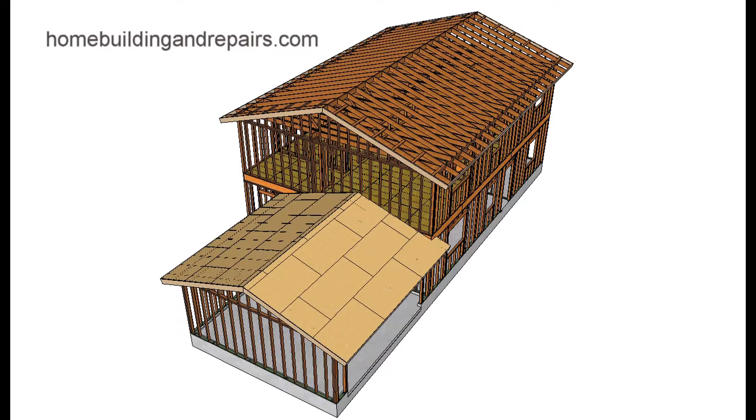Here's another question that I am receiving a little more often lately. People want to store more stuff in their attics, and they want to know if they can move some of the stuff around. Well, hopefully by the time you're done watching the video, you will have a little more information about that. Let's go ahead and look at a purlin.

A purlin usually sits on a wall. Sometimes the wall will be a non-bearing wall. It won't be designed to carry much of a load. Here we actually have the ceiling joist breaking over the wall, so this is a load-bearing wall. But you might have, and it's not uncommon, I see it all the time, a brace on, let's just say, this wall over here. It might actually be in the middle of that, and that's not uncommon.

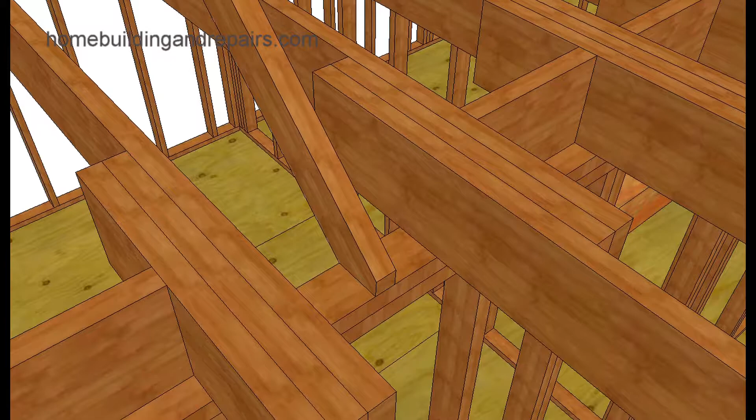Is it something that can create problems for the building? Yes, but most roof framers are not concerned about it. The purlin brace nails to the rafter. You can see it attaching to the wall, and it usually has some type of a block to support the purlin.

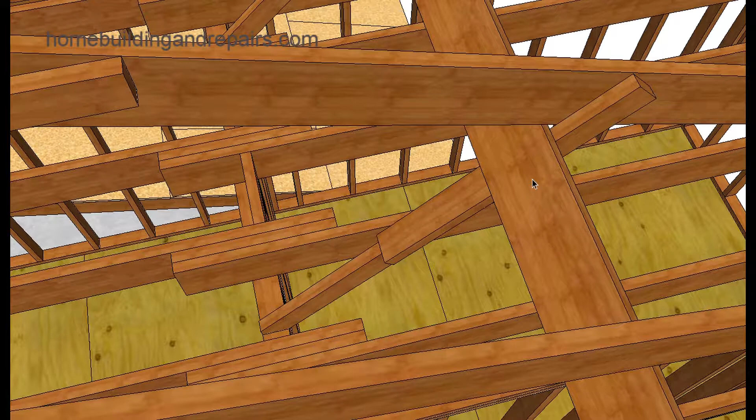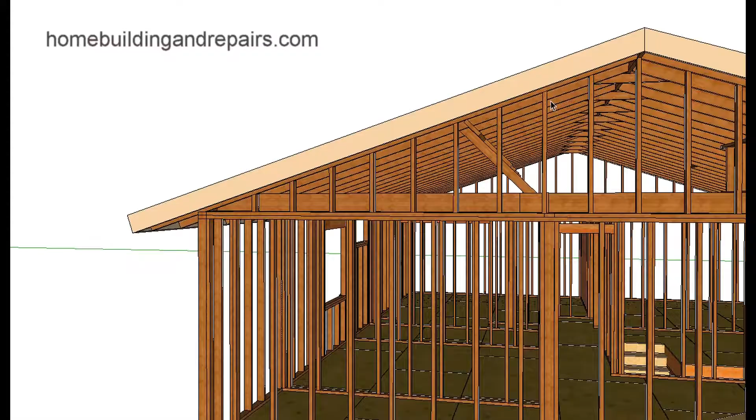The purlin system cannot be less than 45 degrees, so it cannot be 30 degrees. It can be 60 degrees. It can be more than 45 degrees. Now, the one person that asked the question wanted to know if they could remove the purlin that's angled and run something vertical. This is the main reason why I'm making the video, just to give you an idea of some of the stuff that could happen if you do this.

Another thing that I see a lot of is someone wants to build a wall. Hey, I'm going to build a wall, put it on top of my ceiling joists. This will be great and really strengthen the roof. And you're probably right. It will strengthen the roof, but it's also going to be putting additional weight and loads onto the ceiling joists themselves. The weight from the rafters is going to transfer to the ceiling joists and then down to the walls that the ends of the ceiling joists are attached to. I hope that makes sense.

So something like this isn't always going to be a good option, because the ceiling joists might already be at their maximum load-bearing capacity. You put some more weight on it and you are going to create problems, maybe a sag in your ceiling. Is the building going to fall down? Probably not. You build something like this, remove all your purlins and redo it, you might not have a problem.

If you live in an area where it snows, you might want to contact someone who does know what they're doing, and/or an engineer. If you live in an area where it doesn't snow, you don't really have a lot of weight on the roof, and that might not be as much of a concern.

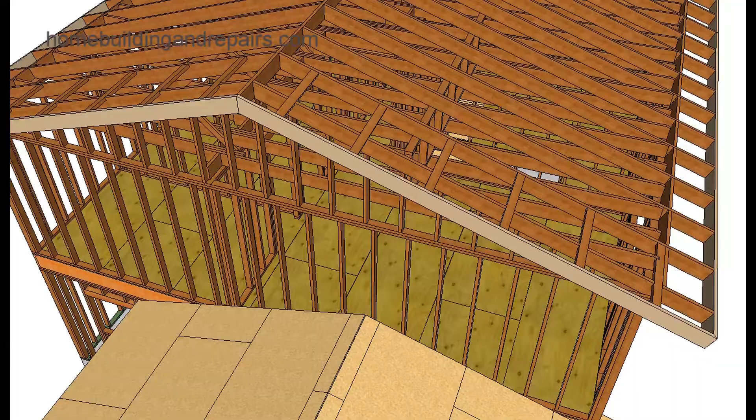Here's the vertical wall I was referring to, and you can see it is not bracing it up over here, it is bracing it up over here, and this could actually be a problem. Before, the purlin was angled. Let's just say that this board is 10 feet long to make it easy on us, and before, the purlin was in the middle, right at 5 feet. And this would be transferring some of the weight from each side.

So we would have a purlin to where we would have 5 feet on this side and 5 feet on this side. And that would be helping out the rafter. The span of the rafter would be basically 5 feet. And if we move it to somewhere like here, this might only be 3 feet and then 7 feet. Well, the 3 feet's going to be a little stronger now, but the 7 feet's going to be a little bit weaker. And that's kind of the point I'm trying to make with the video.

Once you start moving some of this stuff around, your rafters weren't designed to support that much weight. Let's just say they're 2x6 rafters, and they're 20 foot long without any purlins. Or let's just say that they're 20 foot long, and the span for your area, for your design, a 2x6 can only span 16 feet.

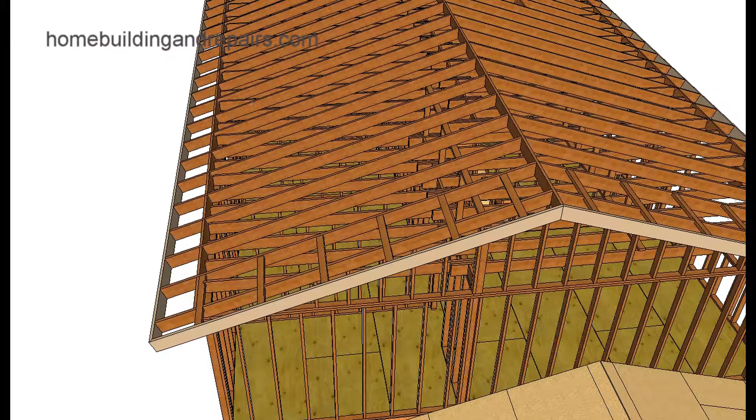Well, if that's the case, you'd better make sure that your purlin does not create a length more than that, the distance, 16 feet. Otherwise, you're going to have problems for your rafters. So I hope that makes sense. So moving purlins and putting walls in, building walls on top of the ceiling joist to support it. I think I've provided you with enough information on what you shouldn't do.

Rafter spans are going to be important. Where do you get that information at? Go ahead and type in rafter spans in a search engine and you'll probably come up with something. Whether or not they're going to be right, that's totally different. And again, if you don't know what you're doing, this is something that, hey, you're watching these videos so you can learn what you're doing, then you might not want to make any modifications to this area.

And again, like I said, keep in mind that I know a lot of people store stuff in their attics. I've done it before, but they're not designed most of the time to store things up there. So if you are going to modify the building and you're going to maximize your storage area, put a lot of stuff up in there, you could actually be creating some big problems.

So that's the main point I'd like to make at the end of this video, is if you don't know what you're doing, you might not want to do it. Hire a professional. You might want to talk to an engineer. And you also might want to consider the fact that these areas are not designed for storage. They're just designed as part of the structure, and you're not going to be putting a library up here. You're not going to be putting a bunch of car parts up in these areas.